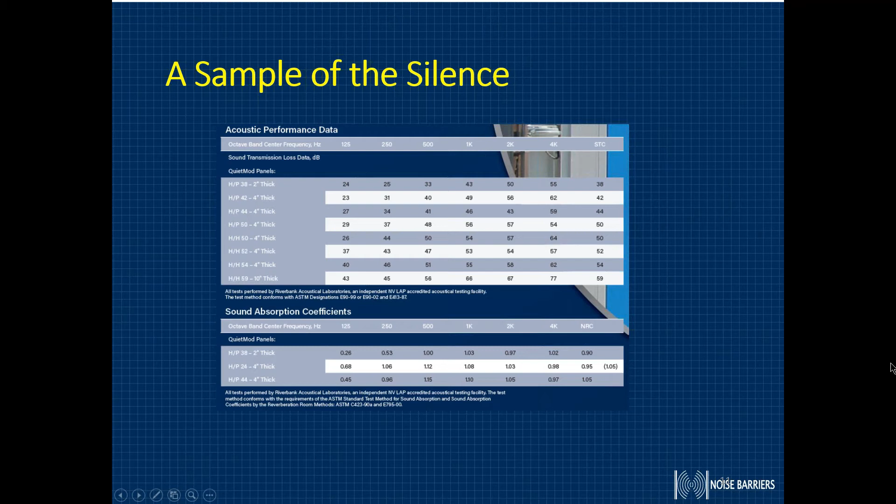This would be a good snapshot of just some of the panels that we offer. All of our panels are NVLAP independent, third-party tested, and we can show you the transmission loss and the STC ratings of each of those panels.

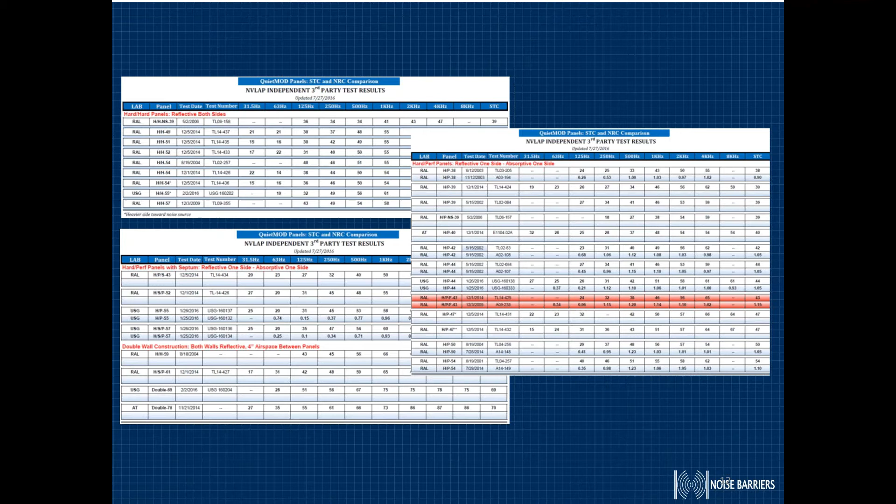The panel designation system is kind of exclusive to noise barriers, or at least how we designate our panels. Noise barrier panels are designated by the interior and outer skin construction and the STC rating. An HP panel would be a solid skin and a perforated skin. As an example, an HP would be a solid perforated panel. The 42 designates the STC rating, so it's an STC 42 panel.

The HH would be a solid skin and solid skin. HSP is a hybrid panel, which is a solid skin, a septum in the center of the panel or near the center, and a perforated skin, which would also be an absorptive panel because there would be fill exposed to the interior. The HHH would be a solid skin, septum, solid skin panel for very high STC rating applications.

Again, 4-inch thick is our standard. We can make panels thicker or narrower, down to 2 inches, and you can always contact one of your noise barrier salespeople for guidance. Typical panel sizes are up to 16 foot long and 5 foot wide.

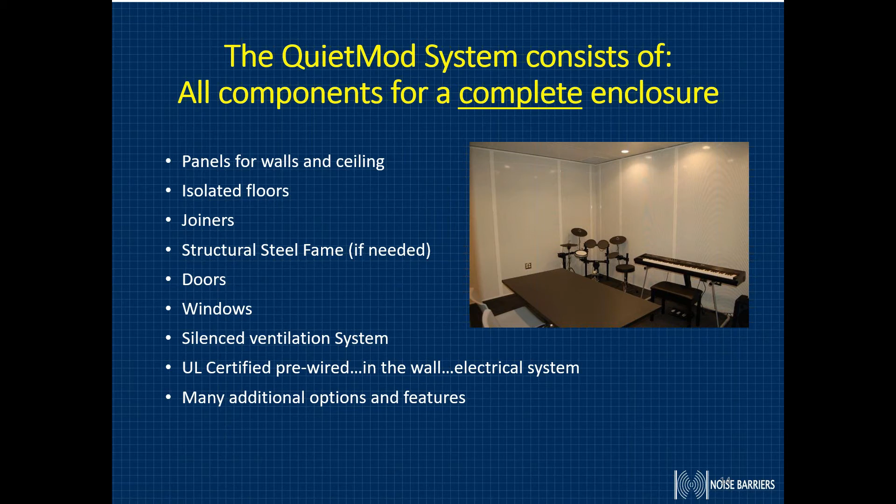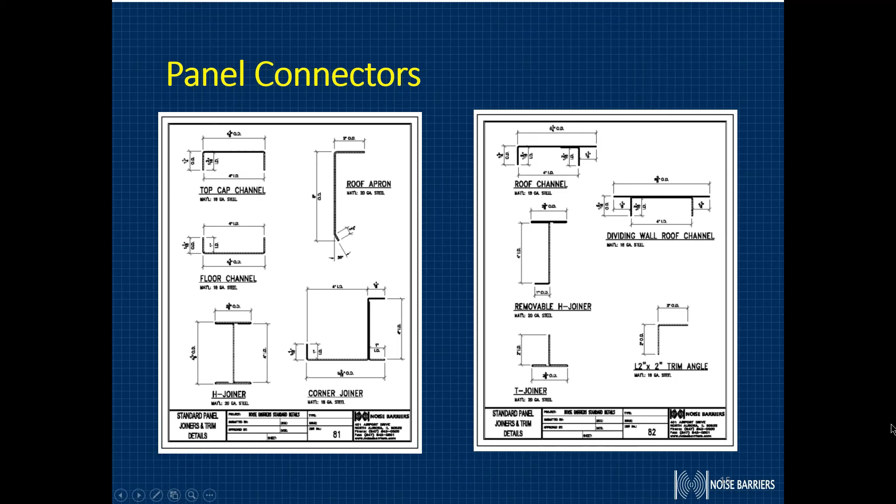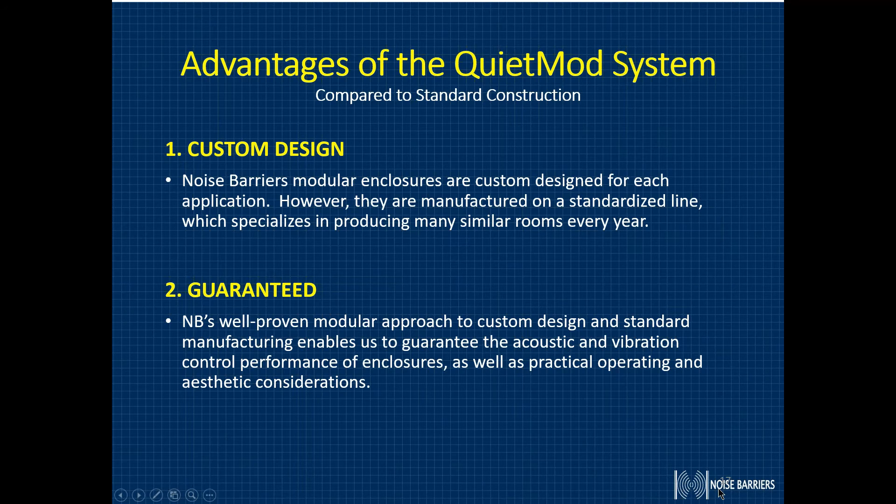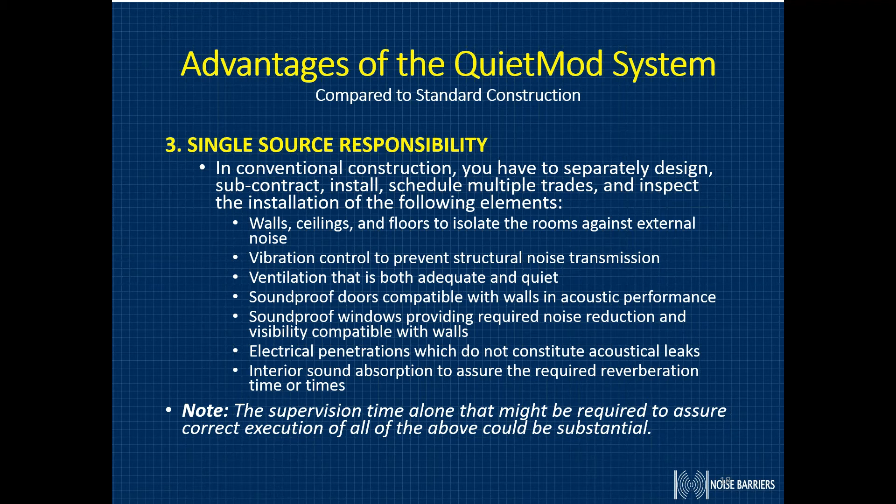And you can note that the supervision time alone that might be required to assure correct execution of standard construction on all the above trades can be very substantial.

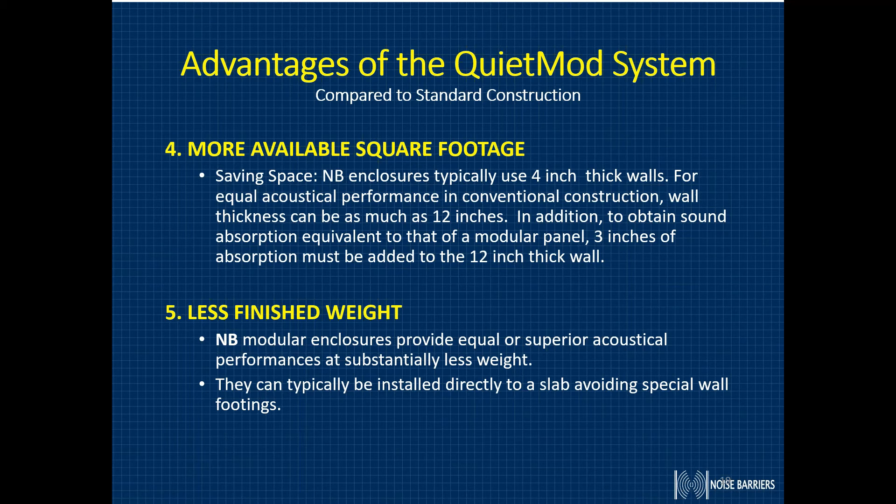It's less finished weight. Noise Barrier's modular enclosures provide equal or superior acoustic performance at substantially less weight. They can typically be installed directly to the slab in a building, avoiding special wall footings, again reducing construction mess.

They're easily moved. It's fast and safe removal, relocation, and reassembly. Of the hundreds of enclosures and soundproof rooms furnished over 18 plus years, a large number have been relocated over short and considerable distances, saving the owners a large amount of money. Relocation and modification of the rooms can be done without loss of acoustic performance.

There's no construction mess. It's a very clean installation. The assembly of the modular enclosures is a clean operation. There's no need to cut sheetrock, no fiberglass to handle, and no concrete to pour. That's the other big advantage. All of our materials show up on site pre-cut, pre-painted if necessary, ready to install.

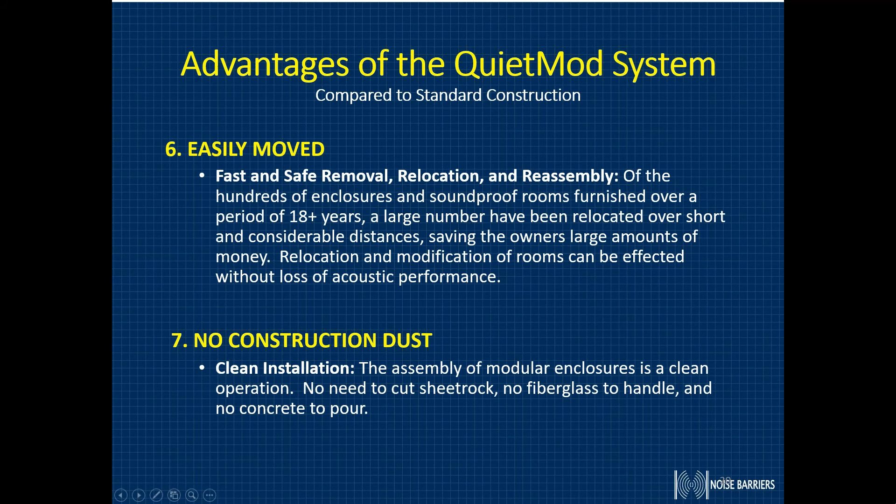We can build any shape, any size, not just square. Shape and size impose no limitations. Angled walls, odd-shaped ceilings, and sloped windows can also be readily incorporated.

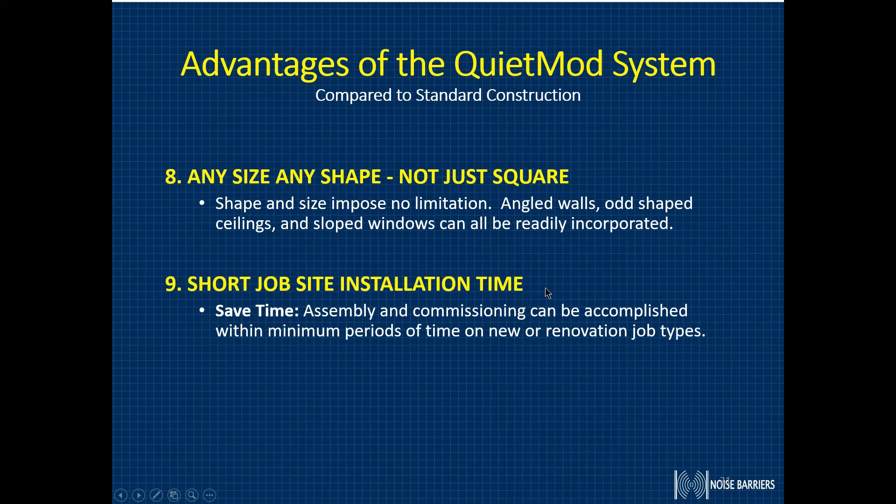It's a very short job site installation time. Since everything's coming pre-manufactured, assembly and commissioning can be accomplished in minimum periods of time on new or renovation job types.

We can factory finish paint. They can arrive ready to be installed and finish painted with powder paint, typically, saving a considerable amount of construction time again, and it reduces your coordination and any mess.

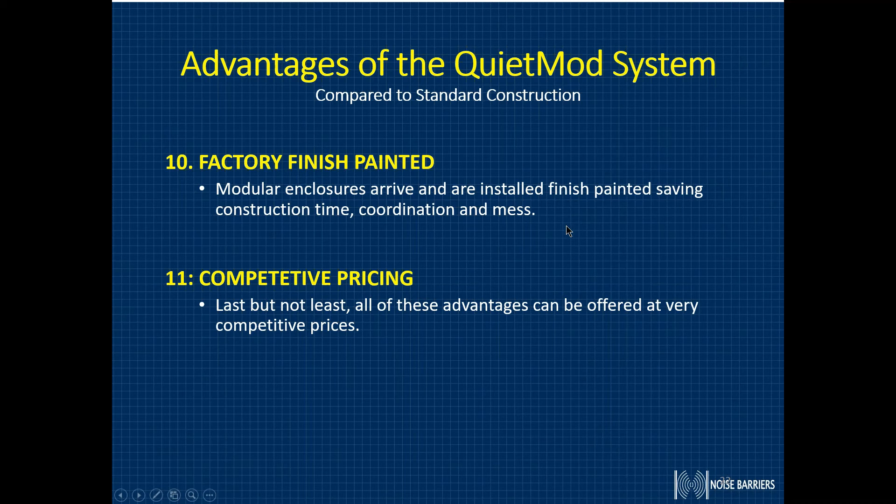Very competitive pricing. Last but not least, all these advantages can be offered at a very, very competitive price.

Some general design information: our typical materials are either G90 or A60 sheet steel. The big difference there would be durability or exposure to weather in the field. The G90 is a galvanized material, a spangled steel finish, and it can be exposed to weather for long terms.

The A60 is a galvanneal material, typically designed to be paint ready. With exposure to the elements, you will notice some white chalkiness that would develop on the skin of the panel if it's not painted prior to field service.

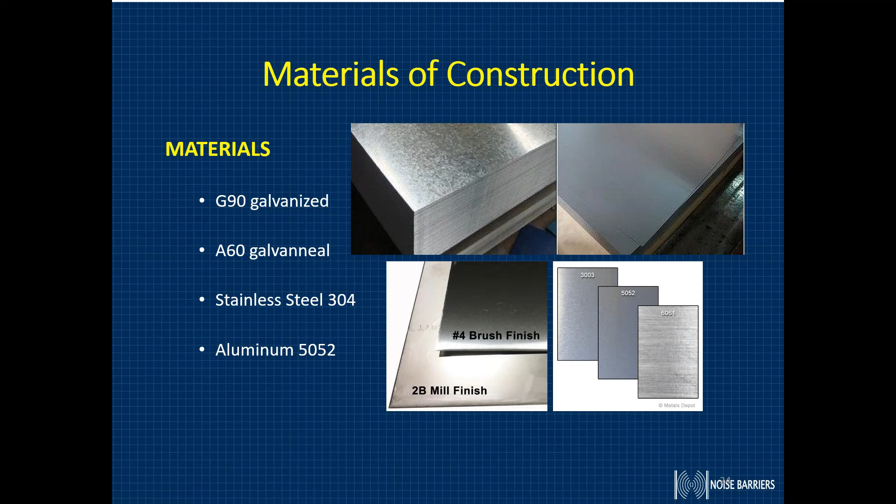We can also build out of stainless steel, typically 304, either brushed or mill finished, and aluminum, normally 5052, which is our aluminum finish.

Available finishes include powder painting in standard RAL colors, and we typically recommend a satin finish. We can also leave those unpainted except for A60, as it should really be painted in the field, but it can be painted by others.

The A60 galvanneal construction is best for field painting. Non-standard colors may take a little bit longer to obtain in powder coating and may incur extra cost. We can check availability with your noise barriers representative.

G90 can be left unfinished to save costs and is typical in many industrial applications. The other nice part about G90 is we can powder finish that with a very, very durable coating, and it gets the added benefit of being more tolerant to weather.

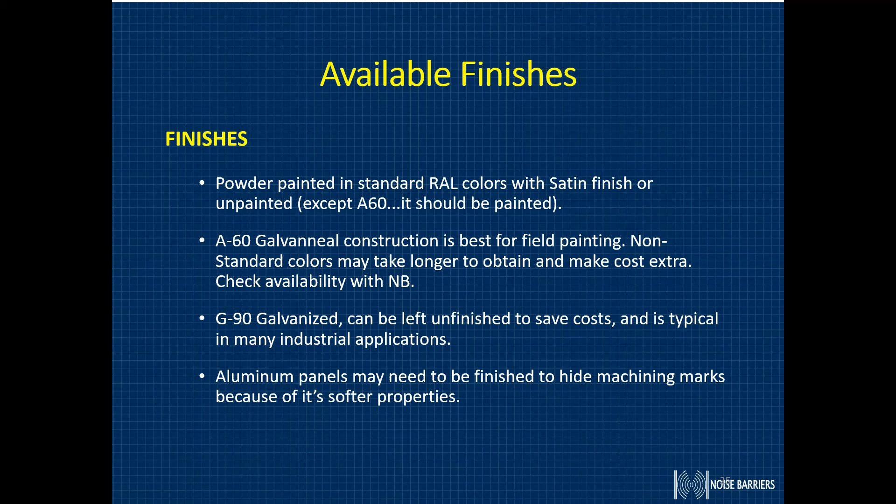Aluminum panels, which are very resistant to any water conditions, may need to be finished to hide any machining marks because of its softer properties.

However, you should note that any of the specialty colors with reds, browns, and yellows are going to be at an additional cost.

This is a great example of how the rooms are actually constructed using the panels, panel joiners, and any of the other components that we're looking at to complete the enclosure.

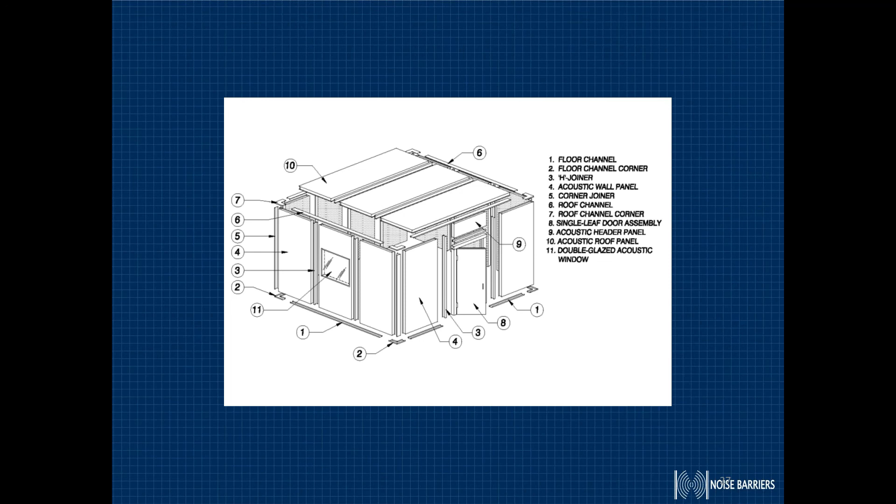Within this, you'd get a full set of submittal drawings every time before we construct your enclosure, so that you have the ability to review and sign off your enclosure before it's constructed.

As a wrap up, in summary, the advantages of the QuietMod enclosures by noise barriers include improved safety, hearing, airflow, and personnel protection. There's turnkey capabilities from design, material supply, and installation service.

We can even PE stamp the enclosures if necessary. Enclosures are designed to meet your specific need. If there's seismic conditions or specific wind loading conditions we're looking for, we can design for those applications.

There's guaranteed acoustic performance, guaranteed airflow performance, enhanced testing accuracy and repeatability. As for tax advantages, materials are classified by the IRS, so you can benefit from an accelerated depreciation and investment tax credit. You can review this with your accountant.

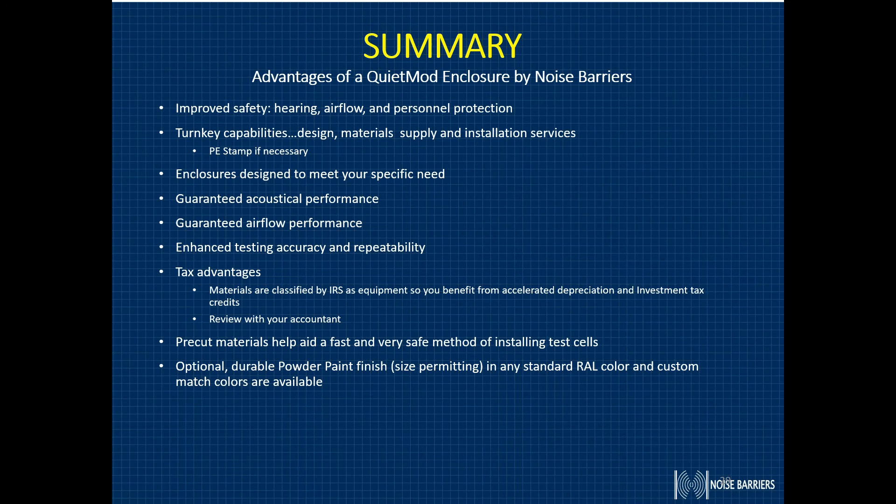Materials are pre-cut, which helps aid in a very fast and safe method of installing the enclosures. There's an optional durable powder paint finish, size permitting, in any standard RAL color, and custom match colors are also available.

They're easy to reconfigure or move, and they have the longest warranty in the industry, with 5 years for materials.